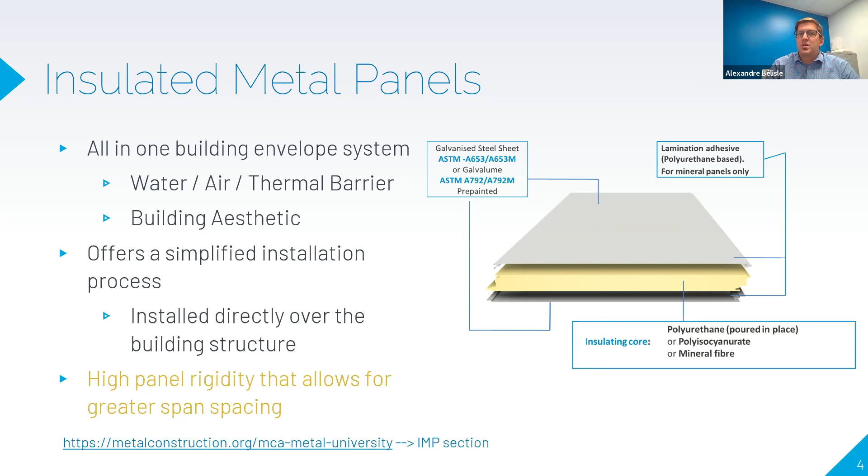So basically, we'll divide this presentation in 3 different sections. The first one will go through the fundamentals of the wind load evaluation, so wind load determination. I assume that for most of you, this will be a refresher, nothing new there. These are simplified explanations. So if we need to dig deeper on some topics, just let us know and we can take that after or another time. The second section will look at the aspect of the panel and the hardware performance that will influence the Girt spacing. And lastly, we'll look at the FM consideration.

Of course, there are a lot of exceptions that will change or that need to be considered when calculating the Girt spacing. So always make sure that you rely on good engineering expertise when doing Girt spacing evaluation.

So if we dig into the wind load determination, there will be different topics. We look at the risk category of the building. We'll look at the wind speed based on the location of where the building will be installed. We look at the building dimensions, the surface roughness, the enclosure classification, and lastly, the external pressure coefficient. Of course, all of this information will be translated into factors, numbers that need to be put together in different calculations to obtain the applicable wind loads that will be considered for Girt spacing calculation.

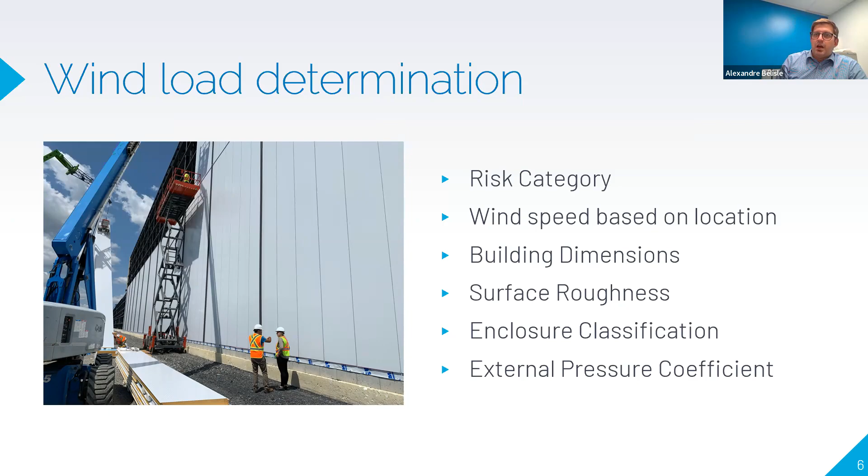As I said, these are the basics of wind load evaluation, but I think it's important to go back to these different items because sometimes we get the perception that people think it can be a lower risk category than what it is in reality, and this can bring a lot of confusion on structure design and application of IMPs on the structure when, let's say, the building was calculated a certain way, and we try to put IMPs over the structure, and unfortunately we're a little bit too high on the Girt spacing than what needs to be. So we need to be careful with that.

Of course, the IMP gives good performance, but we still need to be cautious about those different elements like the risk category. So when you look at this, there are 4 different risk categories, from 1 to 4. The first one is the low risk on human life. These obviously are abstracts of how we describe a risk category. We could have put a lot more information there, but we don't have enough time to go through all of that detail. So the low risk on human life, the image that you see can be something like a shed or a storage warehouse where there are no chemicals or valuables or people working in the environment. So think about, in case of a failure, is there a risk for human life inside the building?

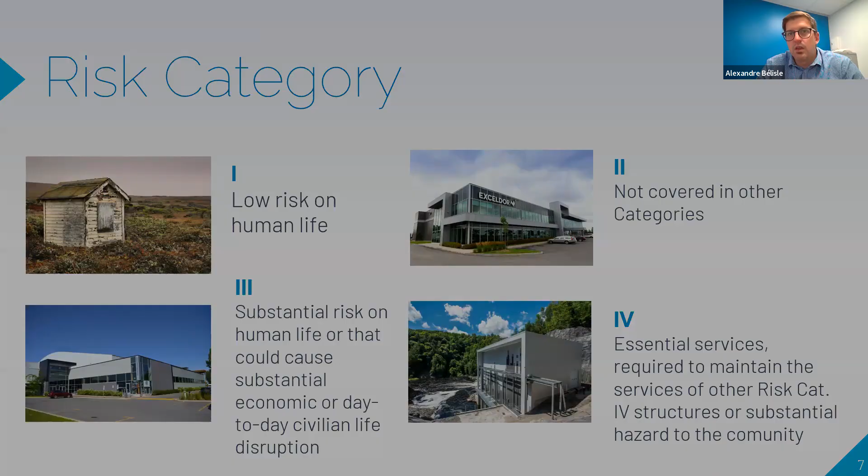Another important part of this information is the wind speed calculation, so evaluation. So we need to find where the project will be installed, what are the applicable wind speeds to the project. Depending on where we are, if we're on the East Coast, West Coast, or for example, if we're in New York City, the wind speed will be different, and we need to take this into consideration. So there's a lot of different websites that will provide that kind of information easily, with a small research.

The one that I'm presenting here is the ATC, but depending on the location, you will have access to different wind speeds based also on the risk category that are presented in the print screen that is there. So note that here, like I said, we try to consider the correct speed based on the risk category of the building we're trying to design.

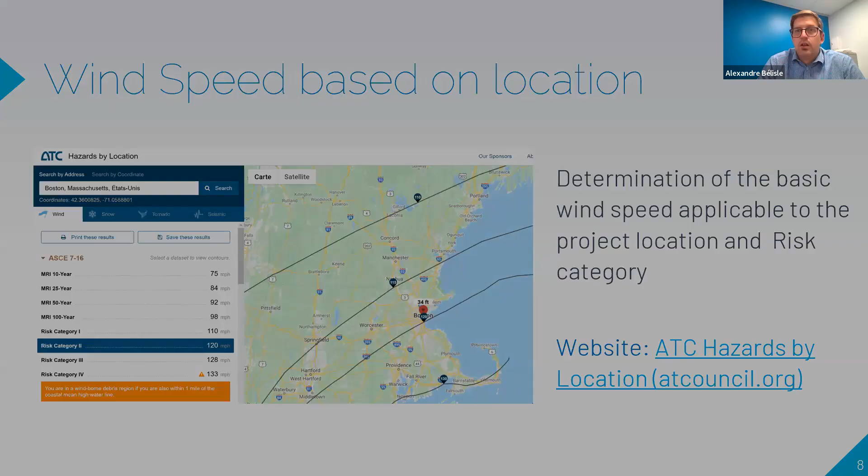Another important factor for the wind load calculation is the building dimensions. Okay, so the building dimensions, we group them into different categories. The first one would be the low-rise building, so less than 60 feet, and typically the height will be lower than the footprint of the building.

The second category is high-rise buildings, so between 60 and 190 feet, and the height will typically be higher than the building footprint. And lastly, the last one is when the height exceeds 190 feet. We don't use the same calculation to evaluate those types of buildings.

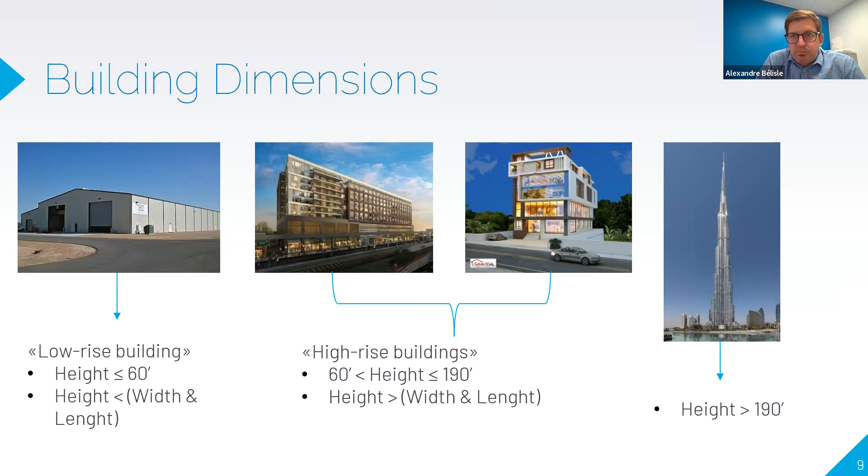Now, we know where we install the building. We know what are the dimensions of the building. We know what will be the risk category of the building. We need to figure out how the environment will influence the wind trajectory towards the building. So we look at the surface roughness. There are three different levels of surface roughness, B, C, and D.

So just consider that the urban and suburban areas would be considered B surface roughness category. And then as you open to more open terrain with a few obstacles, then you will move to C. And then finally, if you're on a flat, unobstructed area, you go with D.

Typically, what we see, it's mostly in the C category that the projects will be built, because when you look at warehouses or refrigerated warehouses or manufacturing facilities, they're often close to a highway or close to fields and things like that. So you're mostly on open terrain, except if you're downtown New York, for example.

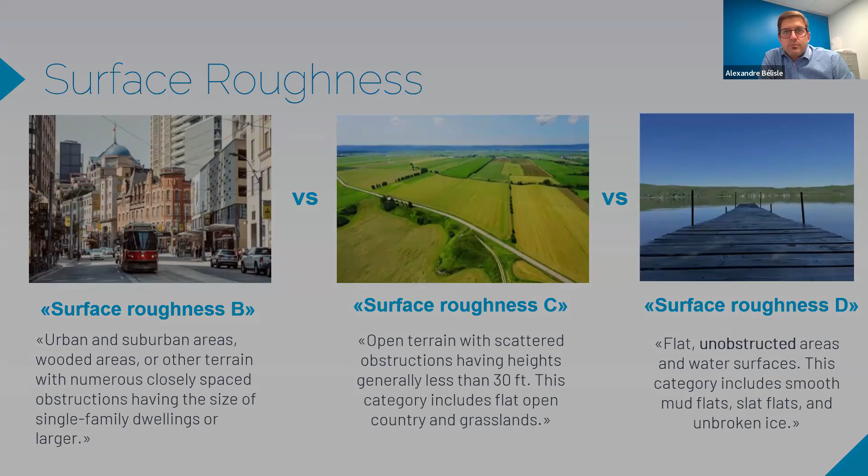The exposure classification, we look at the openings on the building. So this is an important part of the information that needs to be considered, because we need to consider internal wind loads as well, wind pressure as well. So I will say the partially enclosed will be the most stringent from what I've seen or experienced, which is the second one at the top right.

So if we have like a plane hangar or things like that, where you have big openings on one wall, just imagine all the wind that can be engulfed into the building when you open the door, and will add an additional pressure on the panels, on the wall system, that will multiply the pressure that is applied to the panel, in addition to the external wind loads.

So this factor on the opening, the exposure classification, will help us determine what are the internal pressures that need to be considered in addition to the external pressure. So we have 4 different categories here again. So open, which is mostly open structure. 80% of the walls are open.

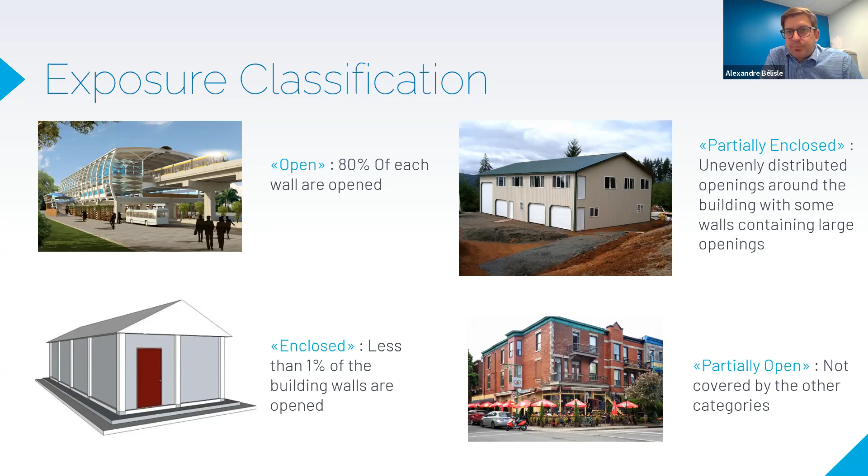Another item is the topographic effects. So basically, we know that when there are a lot of plains and not a lot of obstacles, the way the wind will move towards the plains and the hills and things like that will sometimes increase the wind speed, the natural wind speed.

So this needs to be taken into consideration when doing the calculation, because we cannot consider that the same building located in the same town, but not necessarily exposed to the same topography, will be exposed to the same wind loads. All these items will be considered to provide a GCP and a GCPI.

So the GCP is the external pressure coefficient, which considers the difference in the wind pressure in relation to the building zone. So we will normally consider higher wind pressure at the corners, and depending on the size of the building and the configuration, we need to consider a certain distance from the corner along the wall. And the other item that we look into is the effective wind area to determine what is the applicable wind load depending on where we stand on the building.

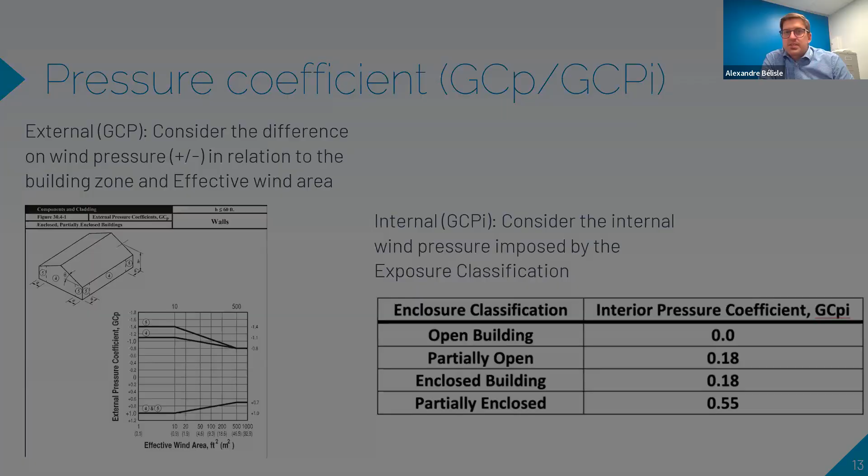So this was the first section regarding the wind loads, but wind loads are one element. Now the other element is how this affects the panels and the hardware that is used to install those panels. There are a lot of different panel systems on the North American market, and all these systems are engineered. So panel manufacturers know the performance of their system and how it will react under high wind loads, under different fastening designs and things like that. So this is what we'll look into right now.

So for the panel performance, we'll look into the panel deflection resistance, the structural element composition, and the fastening capacity.

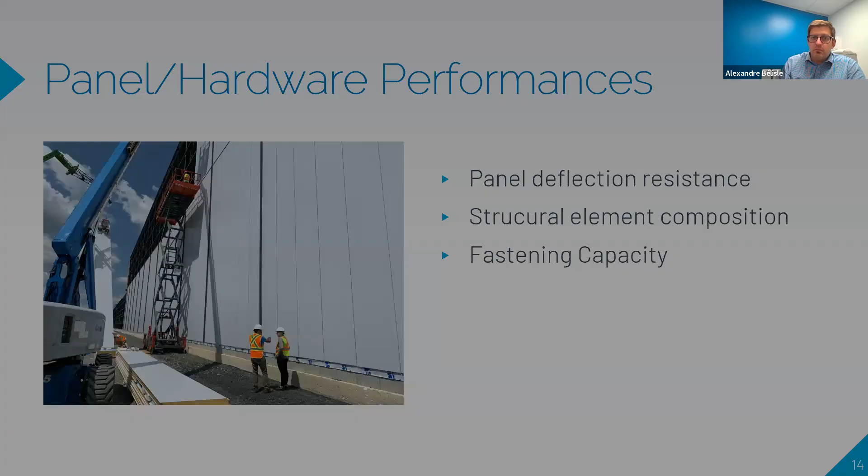So for the panel deflection resistance, most of the IMP manufacturers will use ASTM E72 to obtain these numbers, which is a standard test method for conducting strength tests of panels for building construction. So basically, the panel will be put under pressure to find out what's the weak point, where it breaks, and what's the uniformly distributed load that is needed to break the panel.

There are a lot of different factors, sub-factors that will influence the results. So what's the panel thickness? Typically a thicker panel will offer better resistance to deflection as it offers a more rigid assembly. What's the adhesion between the foam and the steel faces of the panel? What are the foam properties? Some systems will offer higher rigidity, better compression ratio, better shear strength, things like that.

What is the gauge of the steel faces? Thicker gauge steel faces tend to offer better performance against deflection. Finally, another item is the surface profiles. Some will be mostly decorative, but we know that some manufacturers will do thicker or more profound profiles that will help with deflection data.

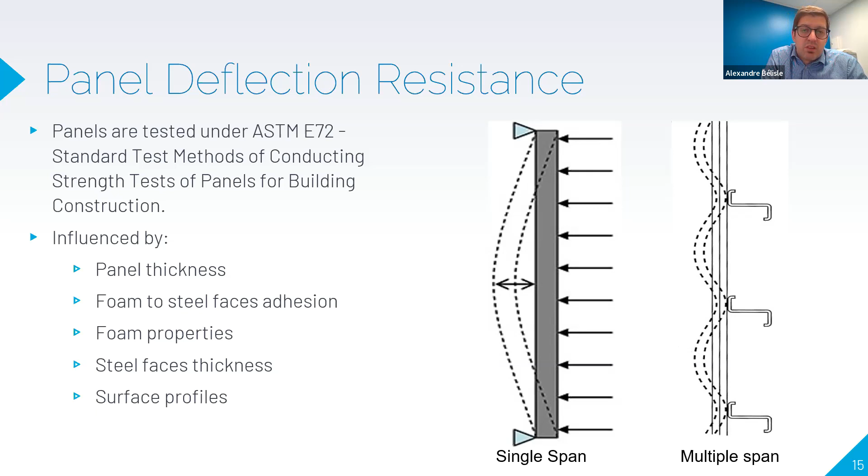On the structural element composition, when we do the calculation, we will ask, or we will propose different scenarios based on what the structure is made of. So depending on what it is, a steel structure or a wood structure. If it's a steel structure, we look into the girt thickness. We take into consideration that we work with construction grade steel, but what's important is the thickness. Is it like an 18 gauge or a 1/4 inch thick structural element that we're working with?

Obviously, in engineering and IMPs, we prefer to work with thicker gauge structure because it eases the installation a lot. But sometimes we're facing thinner gauge structural elements. So we need to consider that this will have a big impact on the girt spacing, as we need to adjust the fasteners in consideration with the steel structure. And as the steel structure is thinner, the fasteners will be less effective.

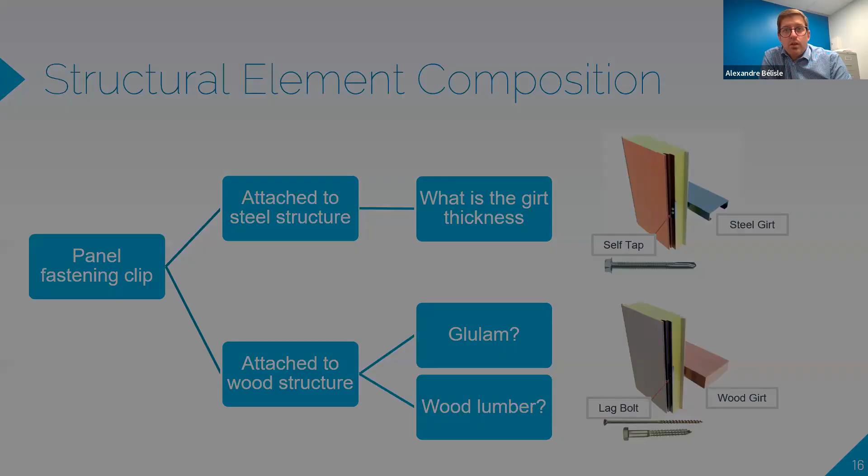Another important part is the fastening capacity. This is one of the limiting factors for girt spacing in most scenarios. What's important here is that all the manufacturers will offer different clips. What you see on the picture on the far right is a clip that has been deformed once we've done some testing with it. But those clips are engineered, optimized, and designed to allow for the fewest clips possible to install the panel, to optimize the fitment in the panel joint.

So we want the clip that will take the least space, that will be easier to install, that will allow installing enough fasteners, because when you have a little more fasteners, it reduces the stress on the fastening system to the structure. And obviously, if you go with too big of a clip, it induces additional costs to the installation. So the clip is also normally designed to keep the cost competitive.

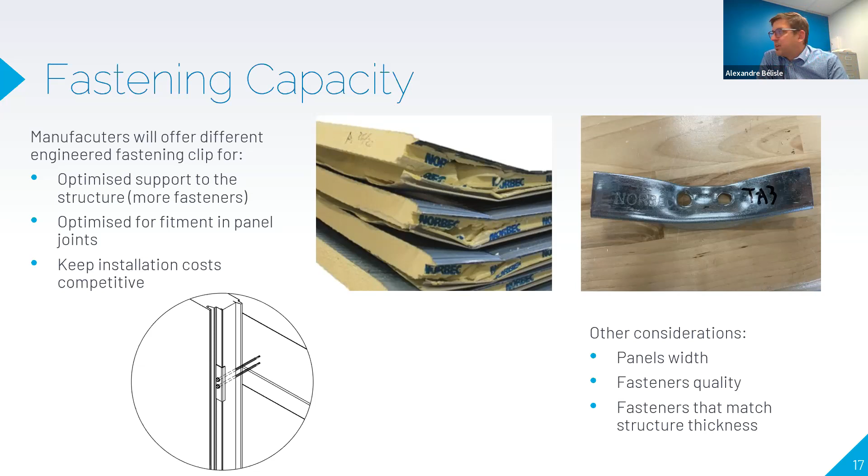We're almost at the end, so this is my last slide of content for you today. Like I said, there are a lot of different exceptions not covered in the presentation, but one important point is when the project requires being designed as per FM guidelines. FM, Factory Mutual, will bring different considerations. The most important one is that the wind load calculation should be based on FM 1-28 wind design, which is really similar to what we typically do to calculate the wind load in the US, but it is more stringent. For example, you can look at the bottom of the page here.

So it can easily double or a little bit more, but it can be easily double the wind loads that are applied to a building.

The installation must be made in accordance with FM approved hardware and FM approved fastening design. So most of the IMP manufacturers will propose FM approved fastening patterns, so that will meet the FM requirement when they conduct the tests.

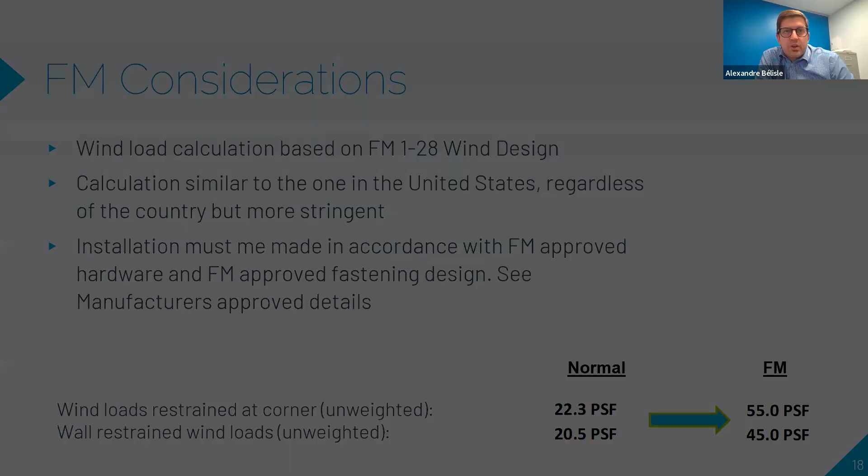So I know that we had a full hour to go through the content, but basically we were able to cover that in about half an hour. So I don't know if you have any questions for me at this time. So yes, we do have several questions that came through in the Q&A, Alex. Okay. Oops. If you'd like, I'd be happy to read those out to you. Yeah, so I opened them here. Perfect. So I see there are three.

The first one: Please let me know if there's any standard specification available to design IMP other than European codes, or is this limited to testing only? We cannot simulate all the practical difficulties through testing, and therefore design specifications are necessary. Yeah, I know that for the European systems, there's a guideline, like a playbook on IMP specification and testing that is almost specifically made for IMPs.

In North America, we need to find testing methods and evaluation methods that are here and there. So for example, if you look for air and water infiltration, you look into AAMA standards or ASTM standards. If you're looking for fire safety, you will look into NFPA standards or UL standards, for example. So you need to go and see here and there what are the applicable standards, and most of the certification parties in North America are well versed. They have a good knowledge of what's applicable to the different panel systems.